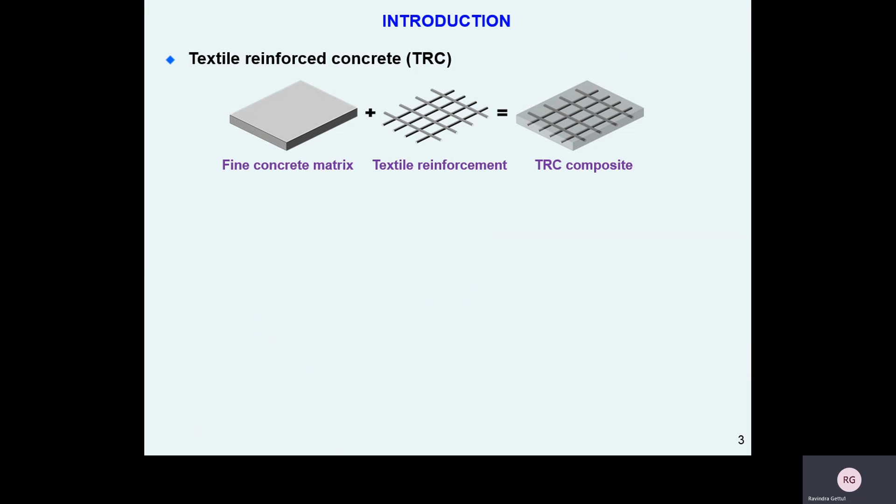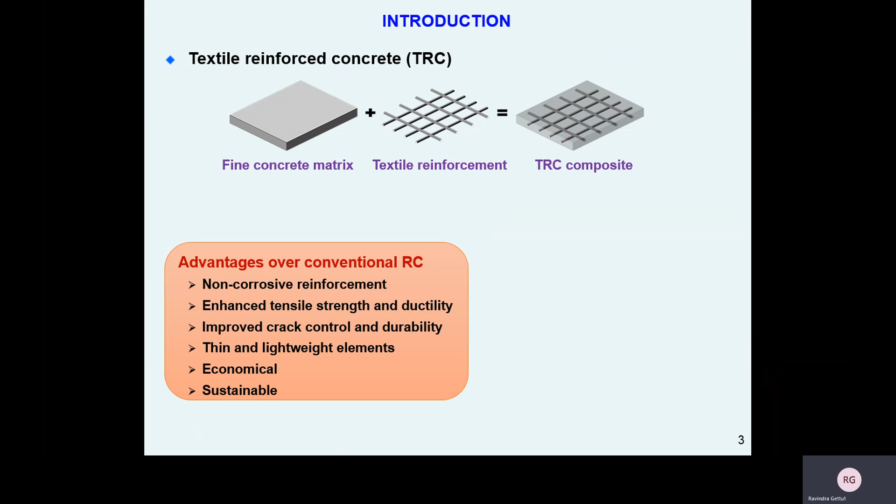In comparison to the conventional reinforced concrete, this TRC composite has certain advantages. The first and the foremost being the non-corrosive reinforcement used in it, which revokes the necessity of thicker cover concrete and hence leads to the formation of thin and lightweight elements. With enhanced mechanical and durability properties, this material proves to be an economical and sustainable one.

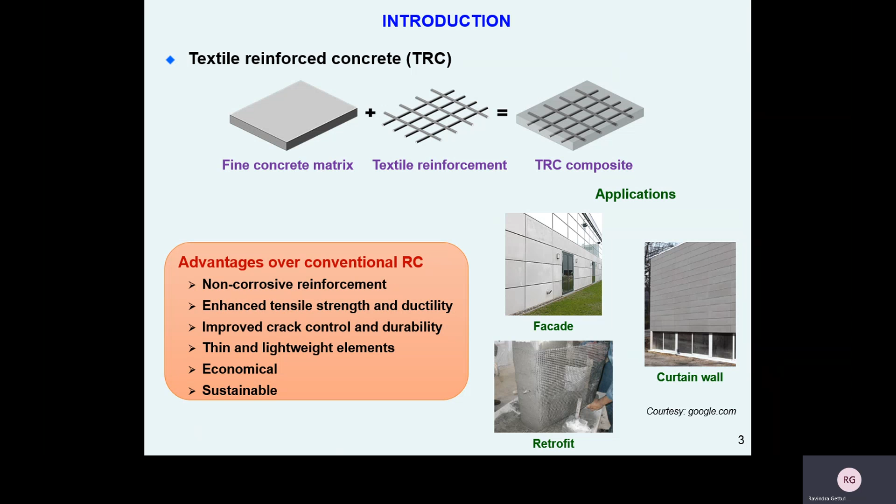Such advantages make it suitable for numerous applications, both structural and non-structural, as well as its predominant role in retrofitting and rehabilitation of structures. Photos of it being used as a facade, a curtain wall, and as a jacket material in strengthening are shown here.

As we all are aware, to use a reinforcement over longer spans, they need to be spliced due to their availability in restricted manufactured lengths. It means that there is a necessity of their connection which should be properly designed considering the stress developed at this joint and the required anchorage length.

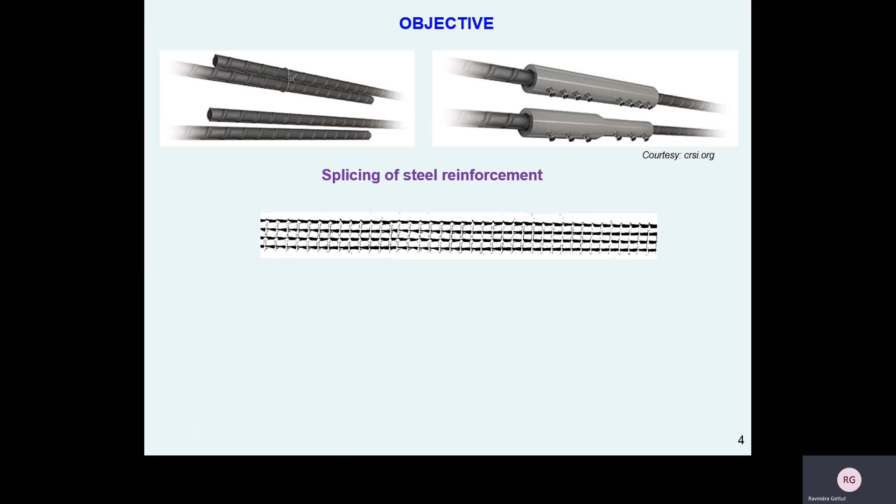Textile reinforcement is no different in this aspect and it shall be spliced too. As we see here, there shall be two layers of textile reinforcement which are lapped. The mechanism at this region of overlap needs an examination. Scarce reports are available in literature examining the mechanical performance of textile reinforced concrete in the presence of overlaps. This research aims to probe this lacuna.

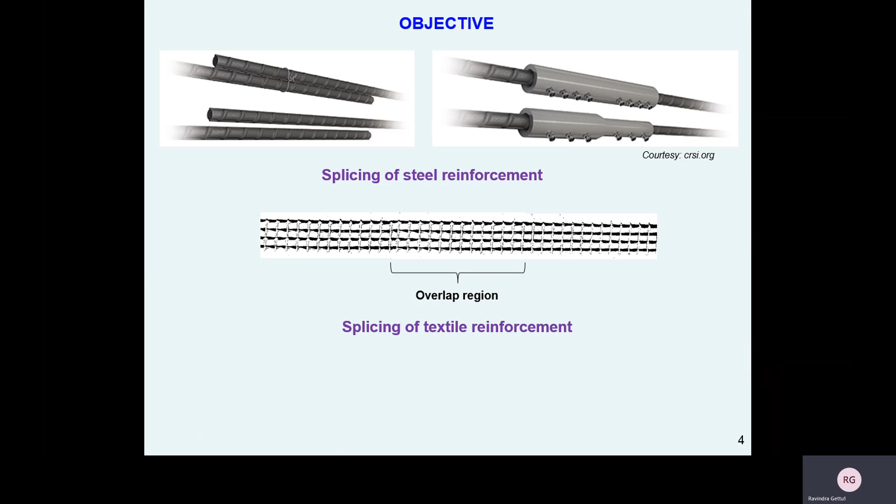Two objectives of this study will be presented now. First is to understand how the performance of textile reinforced concrete improves or deteriorates under tension in the presence of laps. This was probed by testing composites under tension over a range of laps. Second is to examine how a different textile with a different contact surface area over a particular length of lap behaves under tension. That is, for a single lap length, how the difference in the number of yarns or the mesh opening influences the behavior.

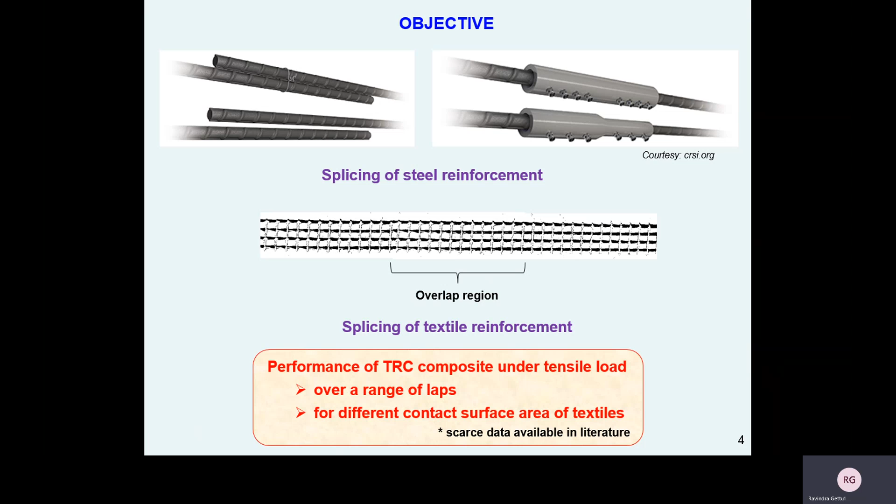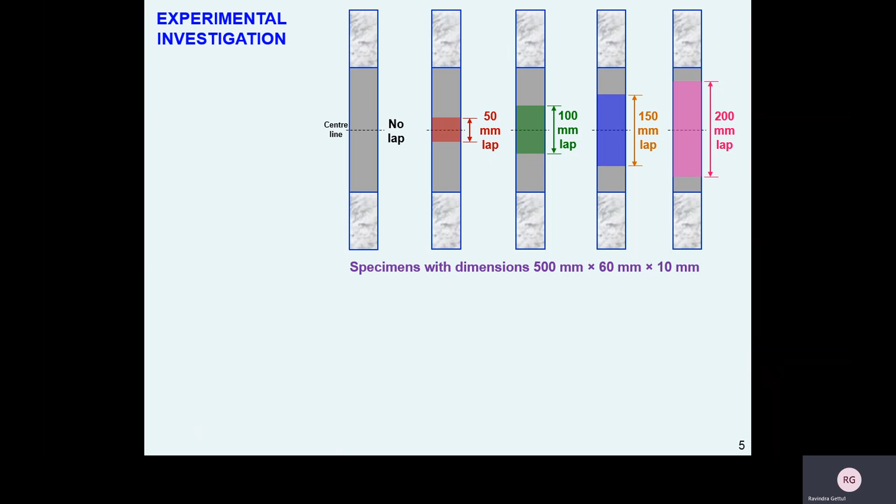Coming to the details on conducted experiments, to verify the first objective, 4 different lap conditions were considered, which were 50, 100, 150 and 200 mm laps for a particular textile. Specimens with no lap condition were also tested for comparison. The specimen dimensions conformed to the RILEM recommendations. To examine the second objective, 2 different types of textiles were selected.

The first type is SBR coated e-glass textile with 15.7 mm by 10.1 mm of mesh opening, and the second type is an acrylic polymer coated AR glass textile with a bigger mesh size of 25 millimeters square. With 7 specimens for each combination, 70 specimens were tested under tension in total.

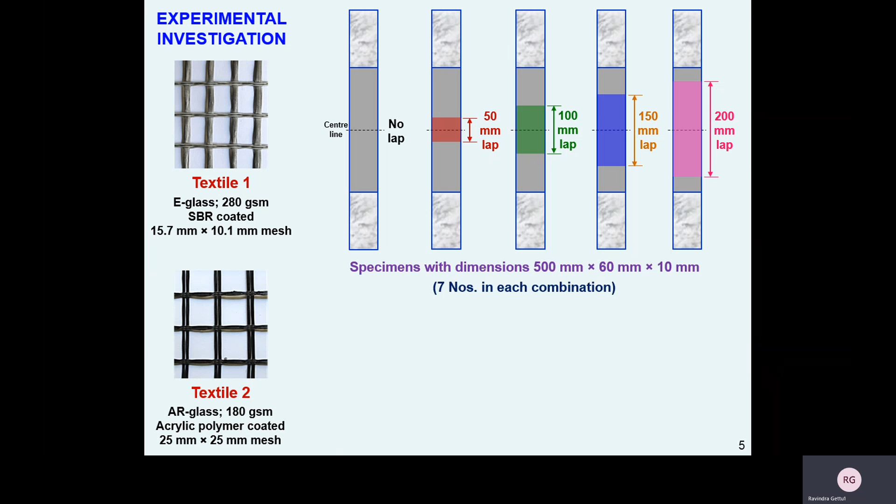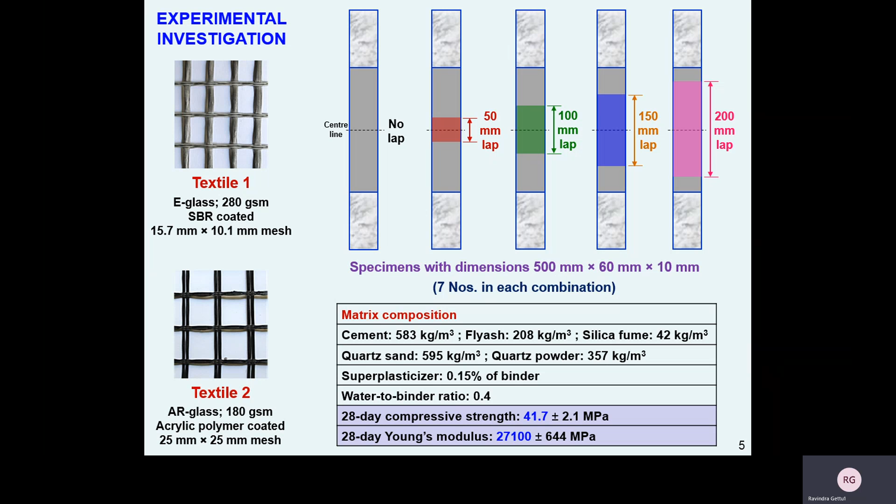The matrix used in this work comprised cement, fly ash and silica fume as part of binder, quartz sand and quartz powder as part of aggregates, and superplasticizer, all taken together at a water to binder ratio of 0.4. It resulted in a concrete with compressive strength around 40 megapascals.

The prepared specimens were gripped as shown in the figure in an electromechanical testing machine and subjected to axial tension. Axial extensometers attached to the specimen and a non-contact video extensometer were used to capture the test data. All the specimens were tested.

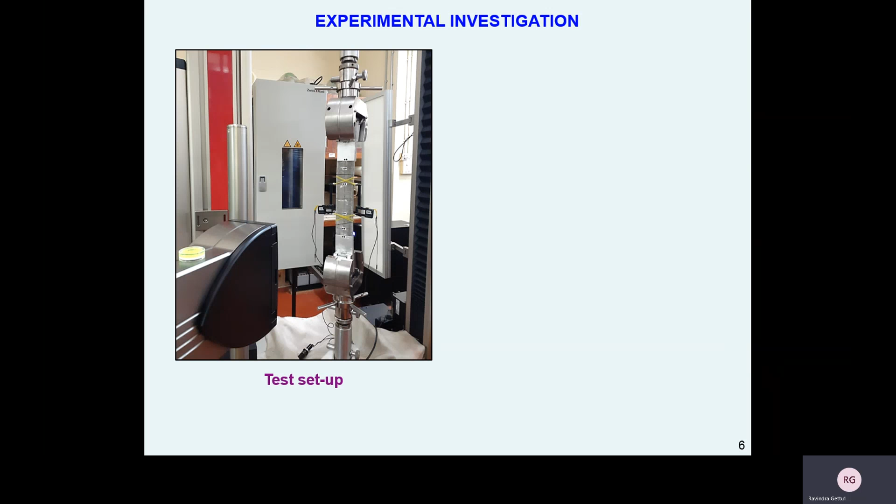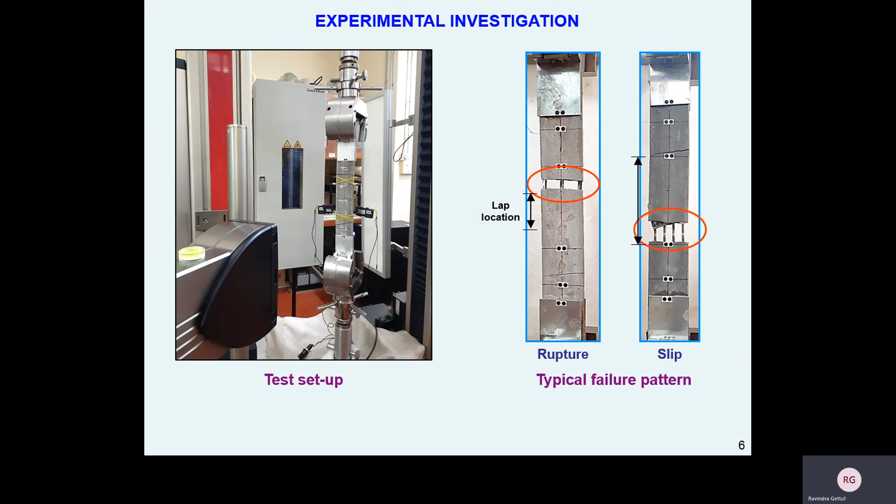Prominent failure patterns were revealed by the test. One was through rupture of textile at a crack, which showed the intact behavior of the lap, and the other was through slip of textile layers at the spliced region. Now coming to the test results.

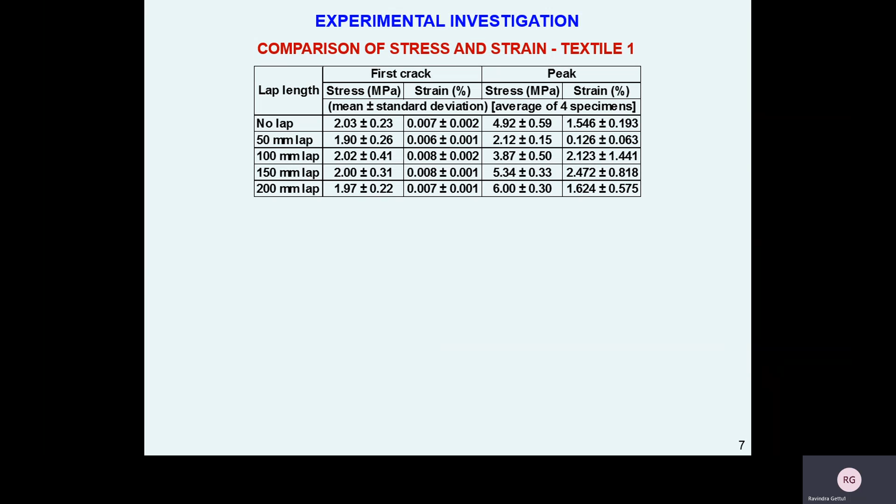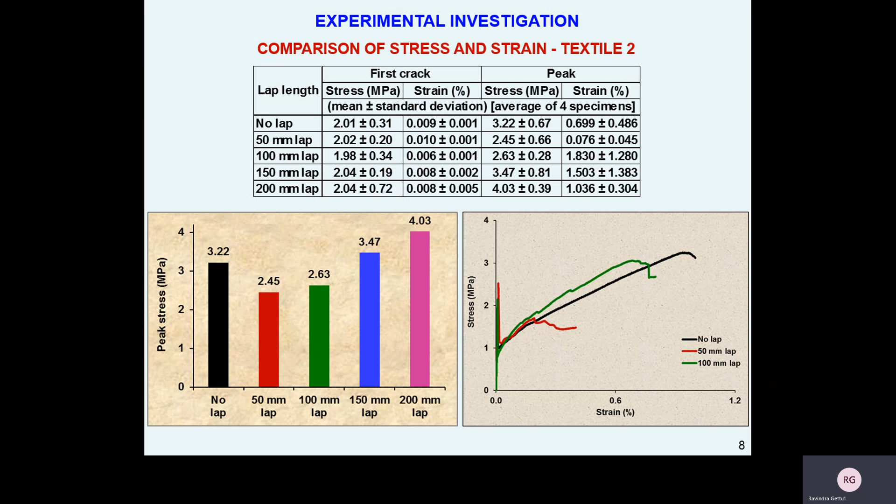The results for the second type of textile made of AR glass are here. The bar chart shows that there is not much improvement between the 50 and 100 millimeters of laps, and the performance is better with 150 and 200 millimeters of laps. This is portrayed in the stress strain behavior as well, where there is an improvement with an increased length of splicing.

To summarize, this research aimed to probe the performance of textile reinforced concrete under tension with the condition of spliced reinforcement, as to how the behavior will vary for different laps and for different textiles. Around 4 lap cases and 2 types of textiles were examined. The first set of results were presented here.

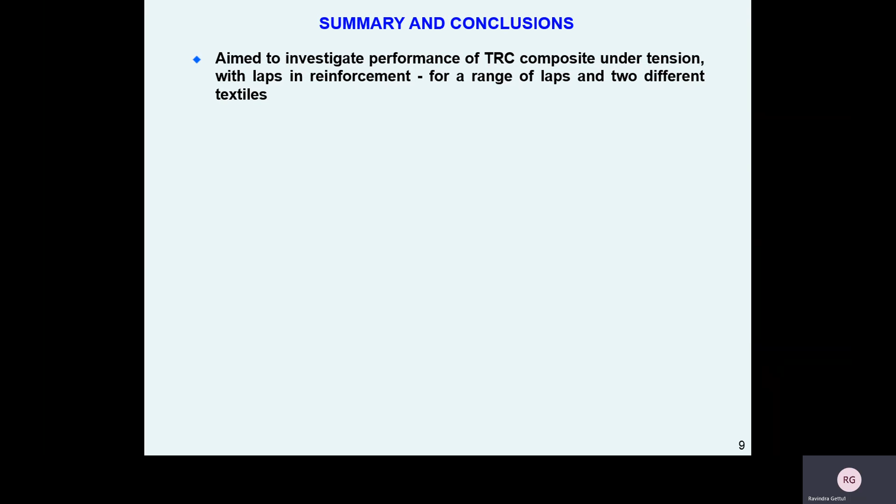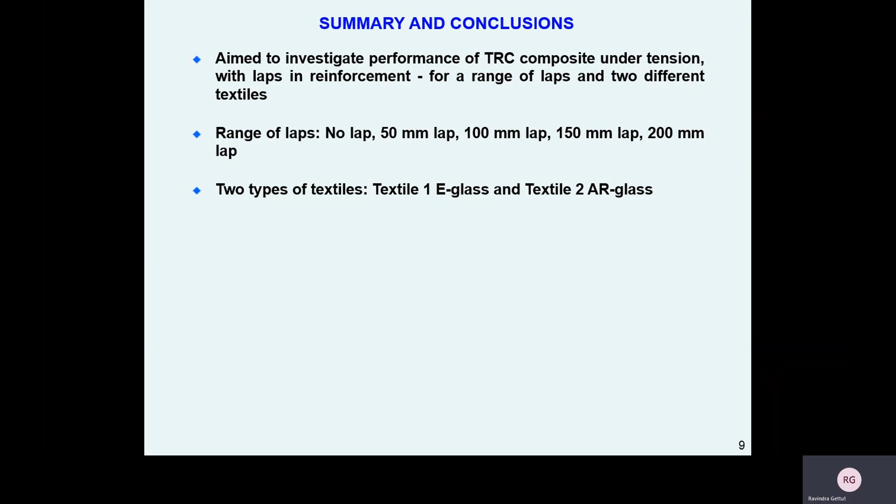It was observed that there is a certain drop in strength up to a particular lap length in comparison to a monolithic case without lap. For the chosen textiles, considerable performance was observed for a minimum lap length of 150 millimeters. However, it has to be noted that this was highly influenced not only by the size of mesh opening but also by the area of yarn available at each joint to transfer the stress.

This work is under progress to understand much better the parameters influencing the stress transfer and to identify the variables necessary to normalize and model the behavior of textile reinforced concrete with overlaps.